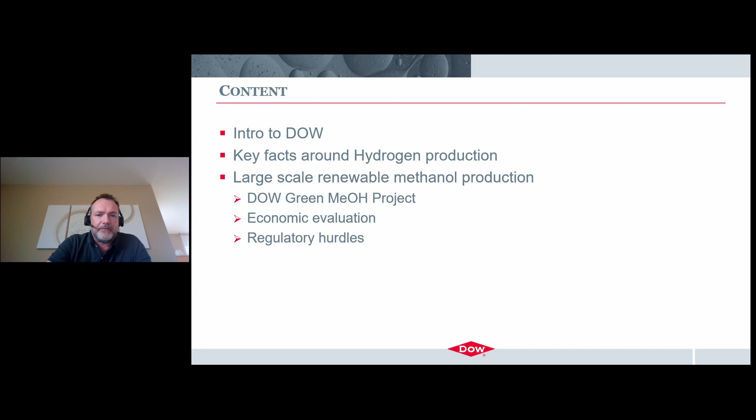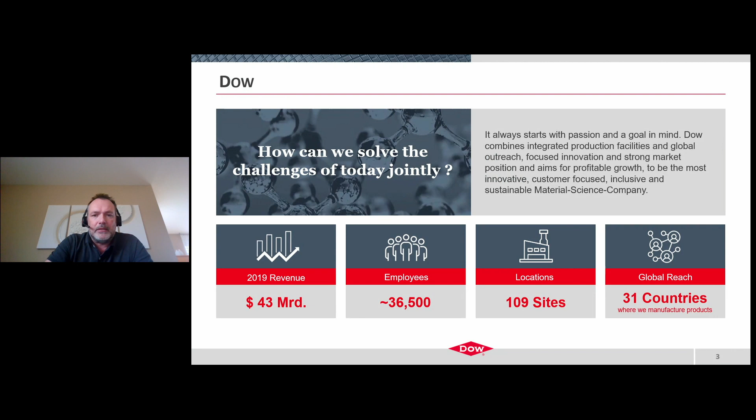Quick intro on Dow. Dow is a global chemical company. We just merged with DuPont. It was kind of a marriage with a pre-announced divorce. So we're kind of in the top 10 of the chemical companies, roughly $40 billion revenue, 36,000 employees, 109 manufacturing sites around the world, and producing in 31 countries. And I think that's sufficient for this purpose.

The reason that we look into methanol is pretty much the competitive advantage that our production site in Stade near Hamburg has. It's right about an hour south of Hamburg. It's 550 hectares of chemical plant directly at the River Elbe. Produces about 4 million tons of caustic soda, propylene oxide. Total investment about 3.5 billion euros, 1,100 people, and it has the third largest harbor in Lower Saxony.

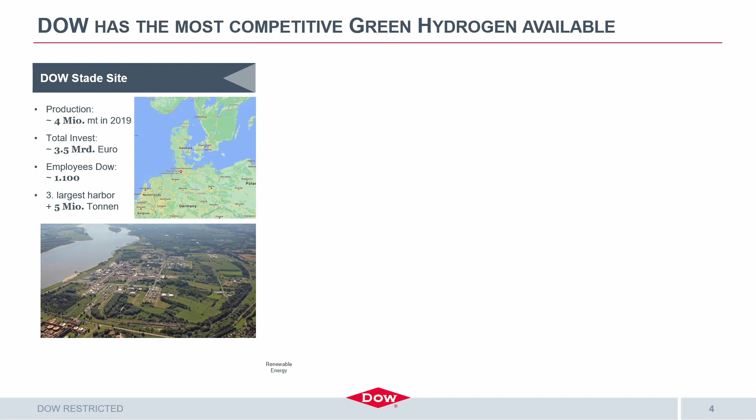So why does that qualify us to look into these things? For the most part, it's a real unique situation when it comes to green hydrogen. We produce, it's the largest chlorine electrolysis in Europe, 1.6 million tons of chlorine produced in a saltwater electrolysis. And so as a quote unquote byproduct, we get almost 50,000 tons of hydrogen coming out of our electrolyzers. We converted that into fueling hydrogen-propelled cars, since we talk to politicians quite a bit, and they always struggle to make sense of numbers like 50,000 tons. How much is that? It would be enough to fuel about 200,000 hydrogen-propelled passenger cars once per week.

In technical terms, it's the equivalent electrolysis capacity of a PEM or alkaline simple water electrolyzer of roughly 280 megawatts, depending on what efficiency you assume. So when we read all these news articles about somebody wants to build 12 megawatts here and 20 there and 5 there, we already have almost 300 megawatts up and running. And given the current prices of an electrolyzer, that would be a typical investment of 300 to 400 million installed total cost. And then also the power cost, if you run 8,000 hours per year and you assume a moderate price of 60 euros per megawatt hour, that would be about 100 million power cost per year. And we already cover that in our cost because we do produce the chlorine and the soda caustic to sell it, so we can dilute those costs.

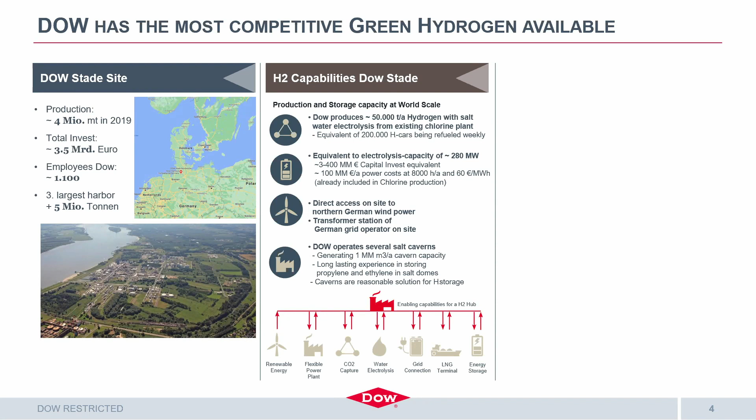In addition, to make this hydrogen green, we would have to connect to green power, and luckily we are connected directly to the north-south power link, and the northern German wind and solar power is flowing through the site. It's not on this aerial image because it's a bit outdated, but TenneT, the grid operator, is just building a new 380 kilovolt connection point here for us.

We are consuming 6 terawatt hours of electrical power per year for the chlorine electrolysis, so we are 1% of the German total power, and that's why we have a direct connection.

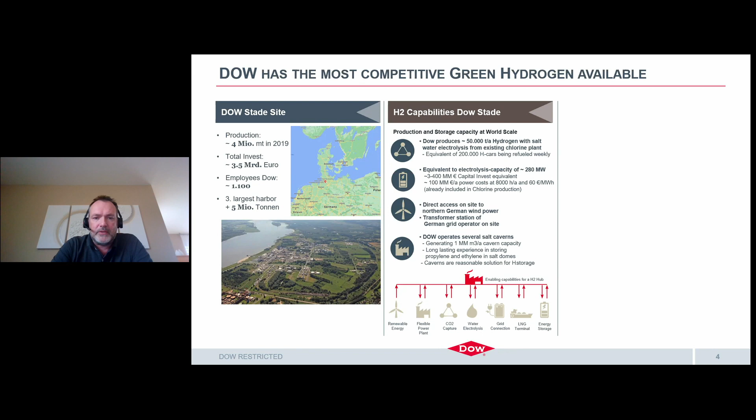Another good byproduct or synergy effect is we consume a lot of salt. The site is built there because it's built on salt underground, and we operate our own mining operations, producing about 1 million cubic meters of salt dome storage space per year. We already use that to store propylene and ethylene in our current operation, but we could also easily create a hydrogen storage cavern where we could compensate fluctuating availability of green power, put it into hydrogen, store it underground.

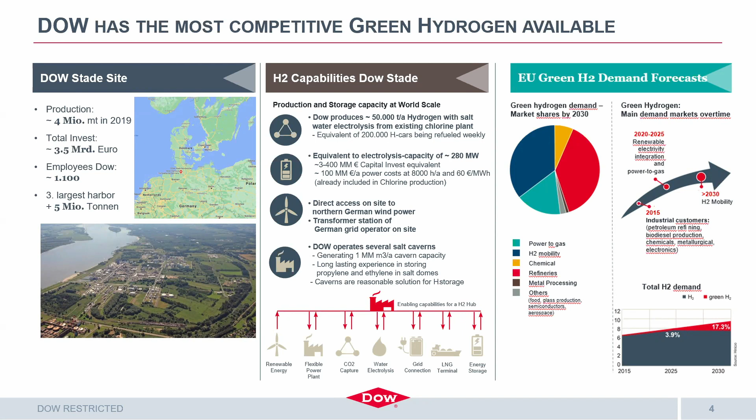So lots of good things, and we certainly appreciate the hydrogen economy picking up momentum. We've seen the forecast by the EU where hydrogen is going to go, and these are the assumed market shares. There's a large portion supposed to go into mobility. We think there's going to be a mix, in line with what we heard earlier today, of direct hydrogen, but also e-methanol and synthetic fuels in general will play a role.

One question could be, why do you look into methanol and not other things? We do look into other things as well. We've done studies on green jet fuel, and we've looked into selling hydrogen for direct reduction in steel making, things like that. But basically what we found is because we also have a gas-fired power plant on the site to supply steam and electricity, we already have a point source of CO2, as was referred to in the previous presentation, which is beneficial.

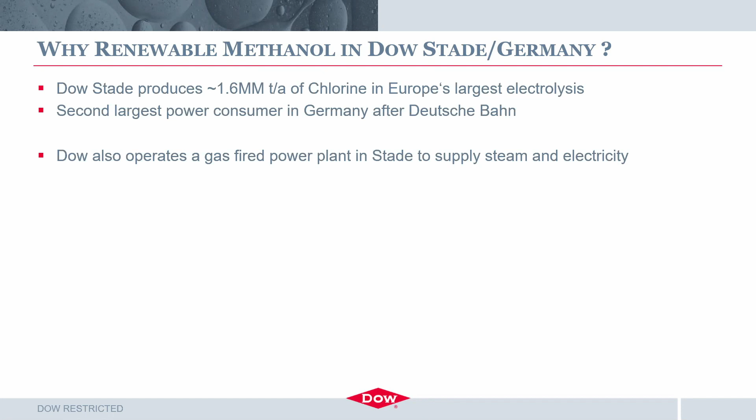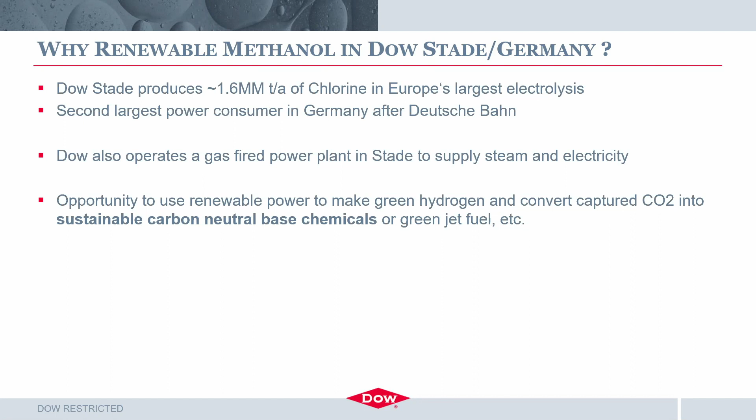So if we look into sustainable carbon neutral base chemicals, Dow consumes a lot of methanol in our production paths. We also found that it's the closest to getting a market outlet that justifies the investment, and I'll explain in a minute why.

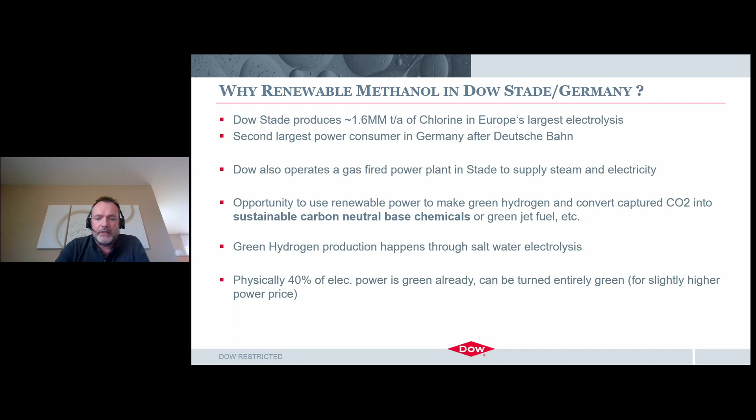So the green hydrogen production already happens through saltwater electrolysis. Today, physically, 40% of our power is already green. But we checked, we can turn the entire power consumption of roughly 600 megawatts green with sufficient availability if we work with the power suppliers.

There are several projects in this space, as mentioned earlier: Port of Antwerp, talking about 4 to 8 kilotons. There's Nouryon and Gasunie, looking to supply green hydrogen for bio-MCN. CRI was mentioned, the Iceland guys. All these announcements are typically in the range of a couple thousand tons per year. Bio-MCN also supplies bio-based methanol in their routes. So there's a bit of quantity in the market, but no real sustainable methanol market.

I think it's a bit catch-22. We don't have capacity, so people don't want to use it, and then there's no real demand, so people don't build capacity.

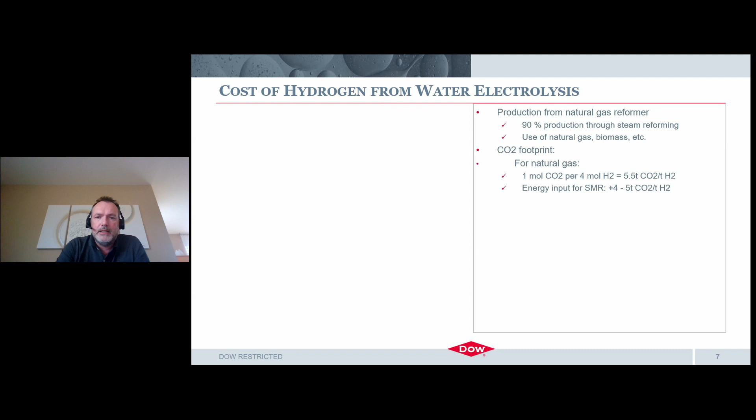One of the reasons is if you look into the production cost of hydrogen, compared to natural gas-based hydrogen via steam methane reforming, which is how 90% of today's hydrogen is produced, your CO2 footprint comes directly from the gas chemistry: 1 mole of CO2 per 4 moles of hydrogen, so 5.5 tons of CO2 emission per ton of hydrogen, plus the energy input to heat it up adds another 4 to 5 tons. So overall you get roughly 10 tons, but the costs are really low, 1 to 2 euros depending on your gas price and infrastructure spend.

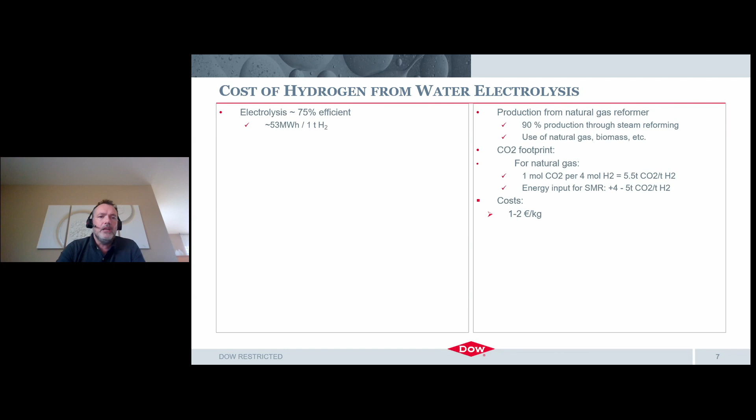On the other hand, if you do water electrolysis to make hydrogen, assuming 75% efficiency, which is what PEM electrolyzer companies promise, though I think it's an optimistic value for now since I don't think they can guarantee that for the whole cycle, but assuming 75%, that means given the energy it takes to split water into hydrogen and oxygen, you need about 53 megawatt hours to make 1 ton of hydrogen.

The capex is roughly 1,000 euros per kilowatt installed. If you go to PEM electrolyzer manufacturers, they'll give you numbers of 700, but you still need to install and hook up all the peripherals. So we usually calculate about 1,000 euros per kilowatt, and stack life of a PEM electrolyzer is roughly 50,000 hours, then you need to restack. There are other costs too: salaries and wages, maintenance, water purification. But if you add it all up, the benefit is really that you have up to 0 CO2 footprint, depending on what power mix you put in there.

Realistically, if you take wind power, you still have a few grams of CO2 per kilowatt hour, but significantly less than the traditional power mix. But the costs are then in the range of what we assume currently, 4 to 5 euros per kilo.

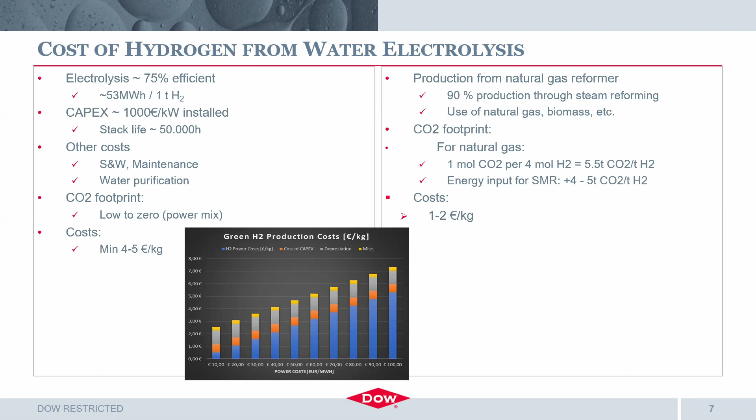So here's a quick overview. If you put these different factors together in line with what was shown before, the main cost factor is electricity. We put the cost of electricity in euros per megawatt hour on the X scale, and then your resulting hydrogen cost. There's an adder for depreciation, capex, and miscellaneous things. But at the typical range where we are, 5 to 6 cents per kilowatt hour, the resulting cost is 4 to 5 euros per kilo.

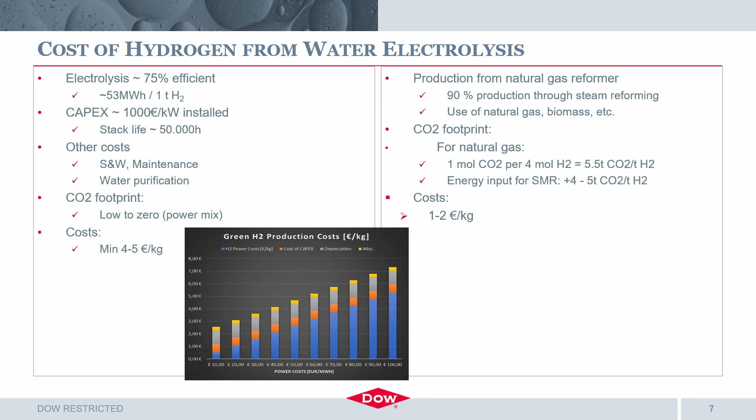There's a lot of promises that the capex will go down. Realistically, economy of scale doesn't really play that well for these technologies as it does for a chemical plant. If you have a pipe and double it in diameter, you have 2 times the material for the wall, but you get 4 times the throughput. So if you have a volume-driven process, economy of scale works well. For electrolyzers, your capacity is based on the area of your electrodes and the current density, so scaling it doesn't do that much. But anyway, there will be improvements, I'm sure.

Internally in Dow, we don't think the production cost is going to drop significantly. We also don't think efficiency is going to go up that much, maybe 80-something percent, maybe 90, but not much higher. So the main driver is power cost.

And there, if you talk to people that give you cost like 2 cents per kilowatt hour in Brazil for renewable, yeah, great. But we need to get it into the grid, we need to get it to the plant. If you build several megawatt electrolyzers, you always have to account for grid fees and things, because I don't think you're going to have the space to set up a complete renewable supply of power next to the plant.

So why do we still look into methanol? Just to give you a few ideas. Renewable methanol needs climate neutral hydrogen, otherwise the footprint is not good.

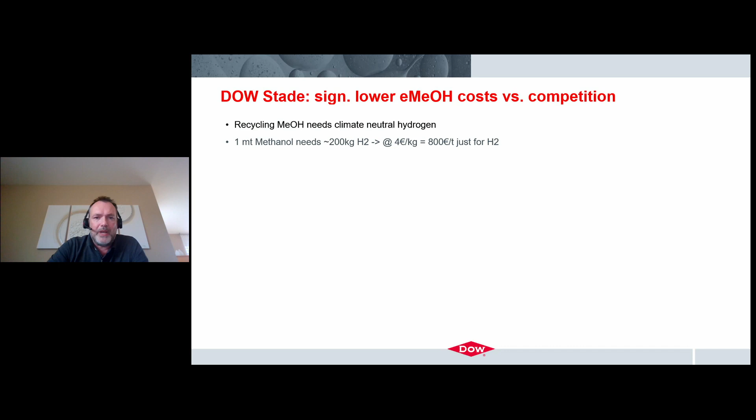And just to do the math, that's why I based everything on kilos here. If you want to produce 1 ton of e-methanol, you need roughly 200 kilos of hydrogen. Stoichiometrically it's 190, but with a little bit of inefficiency, let's use 200 kilos for the sake of the experiment. If you plug in 4 euros per kilo for the cost of hydrogen, that alone gives you 800 euros per ton, just for the hydrogen fraction.

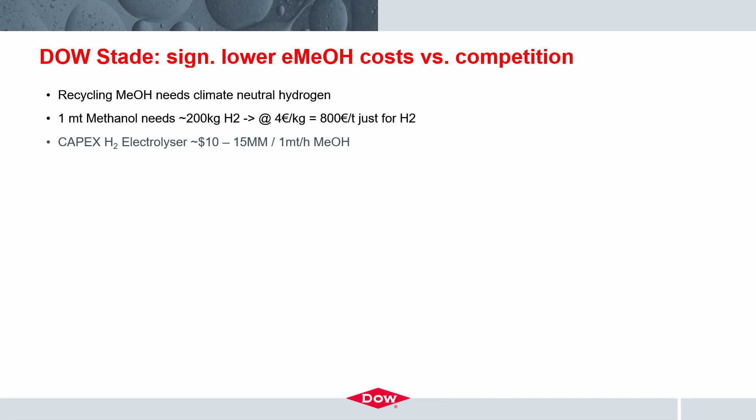You haven't captured any CO2, you haven't paid any operators to run the plant, you haven't built the plant, you haven't depreciated, so that alone gives you a significant cost adder. The capex is quite significant for building the electrolyzer. So for us, with existing hydrogen production, we can compete very well because it saves significant portions.

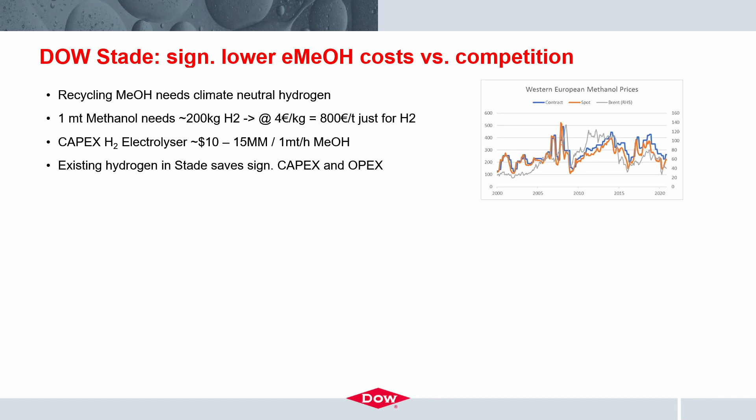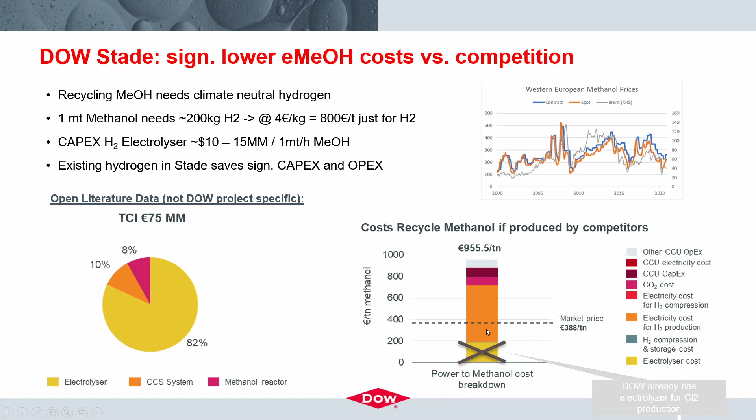If you look at the cost structure of a large-scale industrial production plant, about 80% of the total capex goes into your hydrogen production. If you break down the cost of recycled methanol or e-methanol, power-to-methanol, using these numbers, the lower yellow bar is your capex for the electrolyzer, and the power cost really dominates this. Then you have a bit for CCU, carbon capture and things. But our advantage is we already have the electrolyzer and we can share the power cost between other products like chlorine and caustic. That's why we look into methanol.

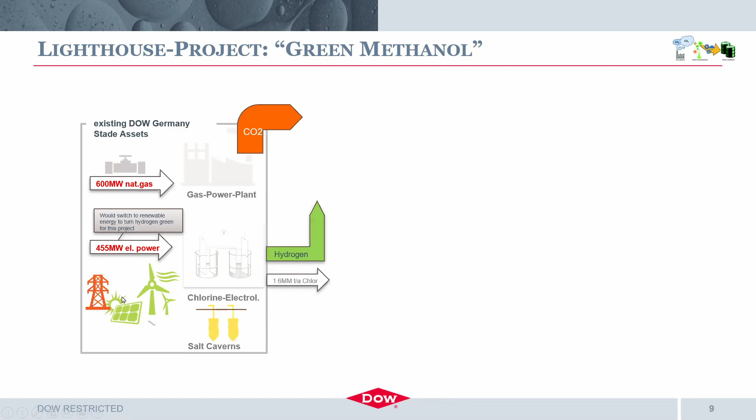So in essence, what we do on the site is we have an existing natural gas plant that takes 600 megawatts of natural gas. We have our chlorine electrolysis that we can switch to green power, and then we would take the CO2 and the hydrogen out of these 2 blocks. In this project that we're looking at, we would do CO2 capture, use the hydrogen, purify and compress it, put it in the methanol synthesis unit, and get green methanol that can serve as a base chemical, or be a biofuel used in marine, trucks, cars, or whatever.

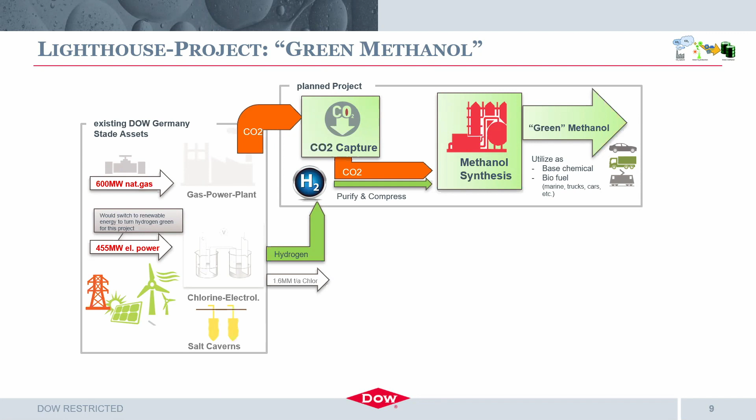A couple of summaries here. We could capture up to 330,000 tons of CO2, which is a pretty large capture unit.

We can use up to 45,000 tons of the hydrogen we produce, which is the 280 megawatts, and we can produce over 200,000 tons of CO2-based methanol, which is about 50 times bigger than what CRI has in Iceland. So it is sizable in the e-methanol market.

It's still much smaller than the 1.x million tons per year typical fossil methanol plants. We do have significantly lower investments than any other location due to the existing hydrogen. We can save on CapEx and OpEx.

And for the environmental impact, we would also avoid 140,000 tons of CO2 that would be generated in addition if you do the traditional SMR route. And we can scale this larger by adding water electrolysis because we do have the power, the power grid connection, and the salt domes.

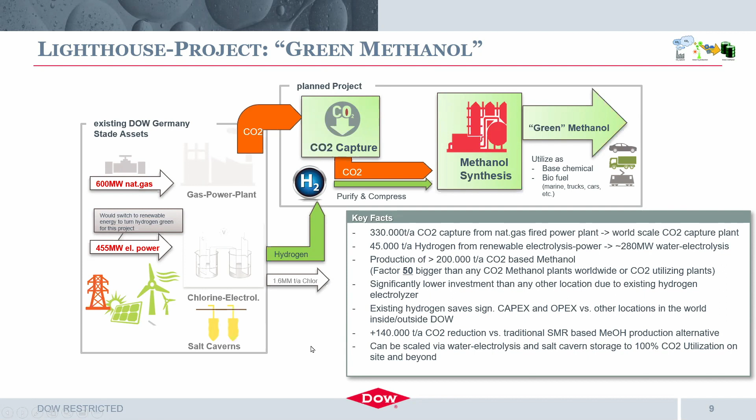So we looked at two capacities using 8 kilotons hydrogen, 58 kilotons CO2, produce 42 kilotons of methanol. That's because the 8 kilotons can be easily freed up in our current integration. We also looked at the full scale, which is then the 210 kilotons.

Setup is an amines-based capture unit. We think it's the only technology that's ready now to put it at such large scales, and then a traditional methanol synthesis. We're also looking in alternative capture technologies, water-based, enzyme-based, but none of those are ready to invest at this scale at this point.

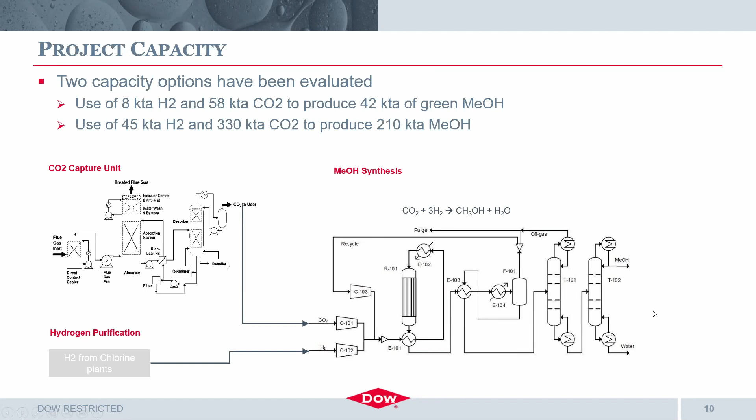We've gotten budget quotes for all these units from the technology leaders, competing budget offers from different suppliers for all the units involved. So we have a fair understanding what the capital cost is to build this thing.

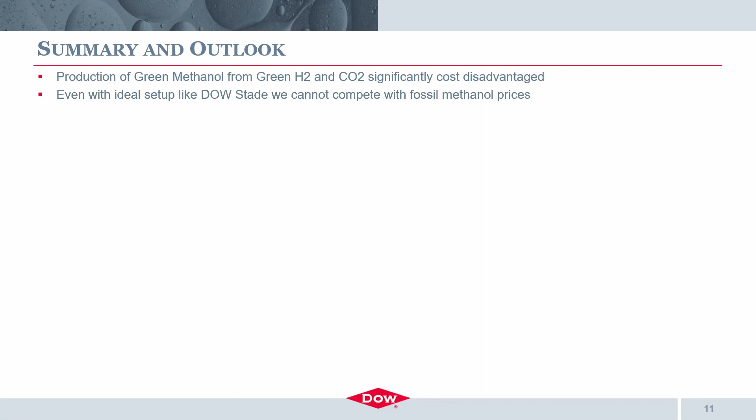And to summarize, the production of green methanol from green hydrogen and CO2 is significantly cost disadvantaged versus fossil. Even with an ideal setup like we have in Dow Stade, where we have the hydrogen at very moderate prices, we can't compete, but we get close.

And so there has been discussion with several potential downstream market players. Marine fuel has been presented, and one of the issues there is that you need 50% more because the heat value is lower. So if you come with a higher price, their fuel costs go through the roof. This is only suitable for cruise industry.

Cars, trucks is one, and chemical use is the one where we have the best return because the cost portion of the end product is the smallest, so they can afford to do that.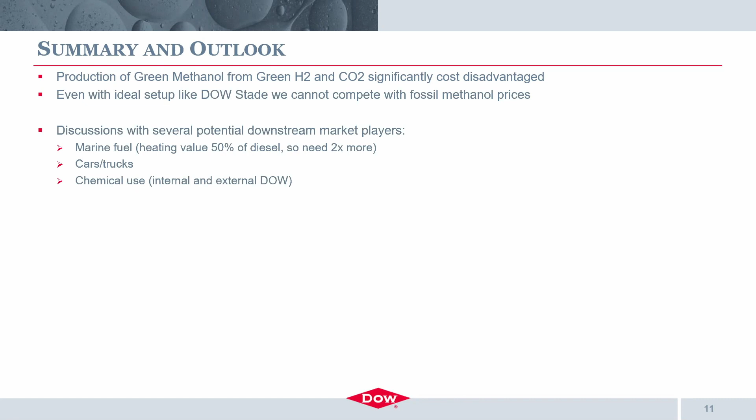A couple of things need to happen to make this a reality. RED 2, the Renewable Energy Directive 2, would be a great way to reduce the hurdle there because we could reach cost recovery. CapEx funding is something that the German government is looking into. Also, important projects of common European interest is the funding mechanism.

CO2 penalties are unlikely to compensate that. If you think about the 1 ton difference, you would need about 800 euros per ton CO2.

One hurdle is carbon capture and use is currently not accepted under the ETS, so we would still have to pay our emissions. And we hope that the end consumer ultimately is going to pay a higher price for green products, which would enable that.

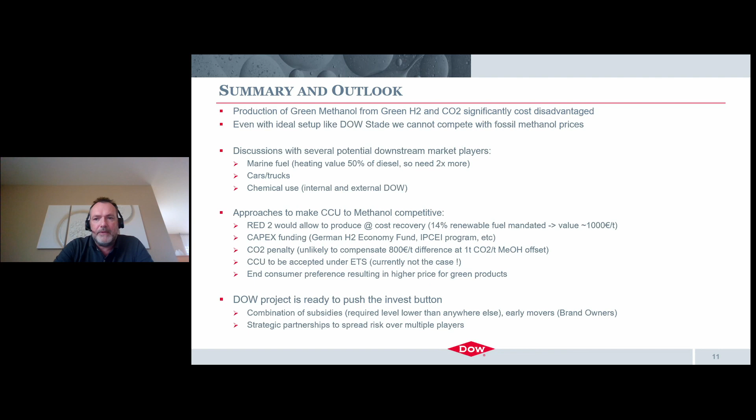So in summary, we are ready to invest. We are getting close. We have a combination of subsidies lined up. We have some early movers, large brand owners who are willing to pay a premium in the chemical use area. And we are currently signing the contracts to have strategic partnerships to spread the risk over multiple players. But it is a difficult business, even though we are uniquely advantaged. Thanks.

Thanks a lot, Jens. I'll follow that up with a question immediately linking to some of the challenges that you just listed up. Question on whether it really is green methanol if you use CO2 from a fossil gas source.

Yeah, we've clarified that with the market—first of all, there's a couple of different things in the market. If you do a life cycle analysis, it counts as avoided CO2. If you really want to be green, then you could also switch to biogas going into your gas-fired power plant, and then you would have bio-based CO2.

But from what we learned from our brand owners and off-takers, they would be okay with using the point source of a fossil plant because it's not built for that purpose, it's already there. So we basically avoid the emissions.